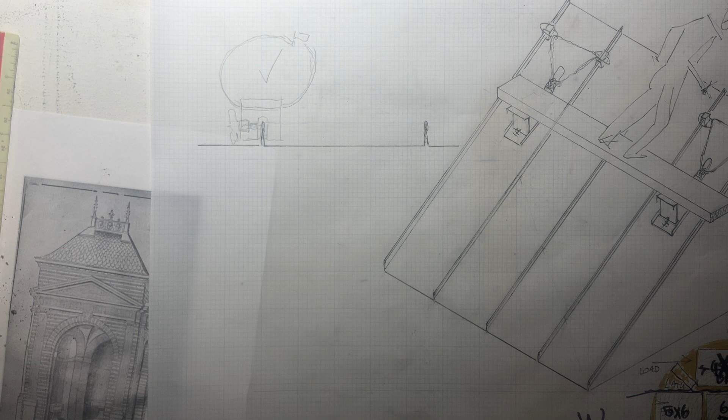Artemio asked a couple days ago, could you do a very basic drawing of a home? I know nothing, but I'd like to learn. Thank you. Buddy, I love this. Truly, this is what we do here. This is what we do here. So, I'm going to walk through my comments to what you told me about your area.

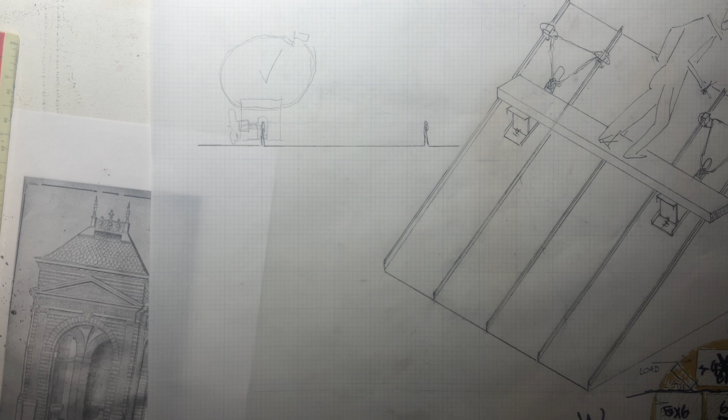First off, we're in Idaho. I don't know that much other than it's a 1925 bungalow. I'm going to assume if it's a bungalow in 1925, it's in a town and not just a lonely house. So it's in a city block on a lot. And with that, we don't want to get too out of bounds with our shop or garage. We want something that's going to blend with the area, blend with the style, right?

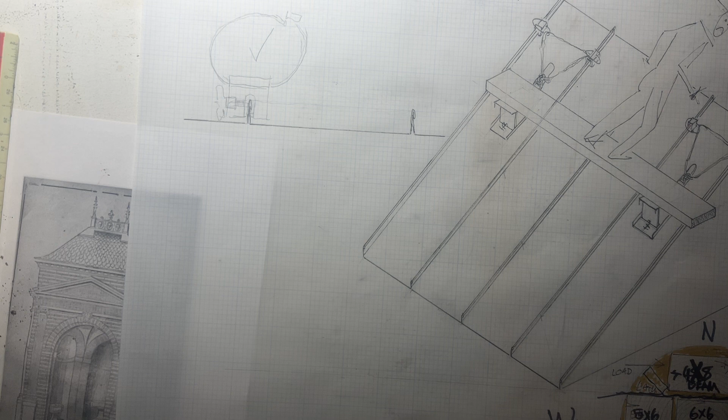So, the first thing that comes up when I search for bungalow garage is an article in American Bungalow. What year is this? It doesn't have a year. 2017 published. The Bungalow Garage. Basically it's just bungalow house styles copied into a one bay space. Which is fine. I don't want to knock it.

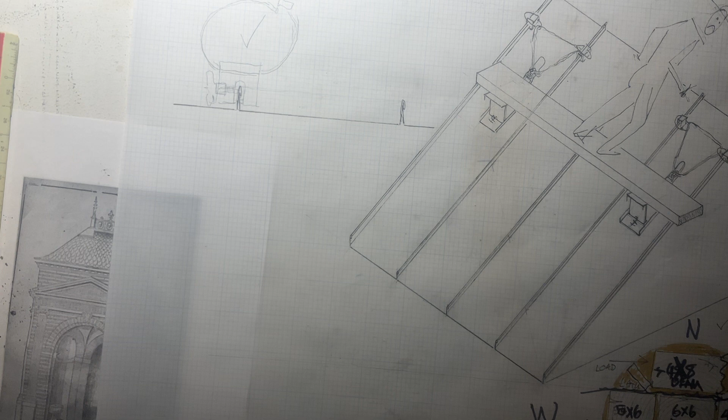There's nothing wrong with that, but the thing about bungalow garages from the 20s and all bungalow houses is they had access to really good timber from a catalog that we don't. And that's the big elephant in the room with all full timber structures or anything that dictates a whole lot of timber consumption, right? Is that we don't have the trees. Yes, trees grow. We're not dumb. We know that trees grow.

Trees grow big enough to harvest, but they don't grow big enough to harvest noble timber like we used to have in the 1800s. You need a couple hundred years for things to regenerate, and you need actual human management on the forest. It's not about virgin forest. It's not that they grew unmaintained. It's they grew managed.

There's a whole video on it on my TV channel, Trad Building Videos. Tom Wessels tells you how to read the forest. Don't watch it unless you want to be depressed, because if you do the forensics honestly, the story isn't great for timber. You need a 2-foot log minimum to make a crown beam.

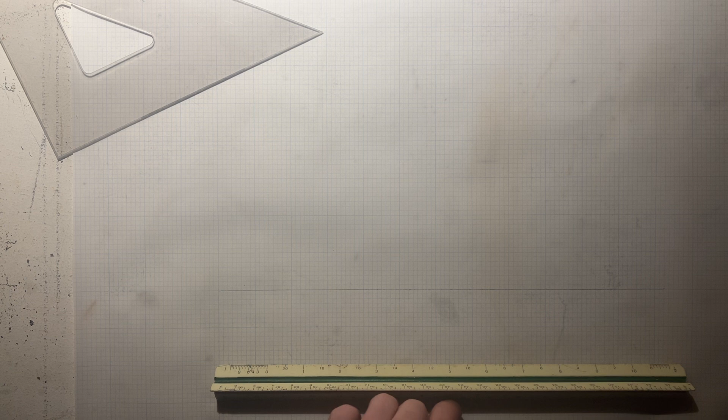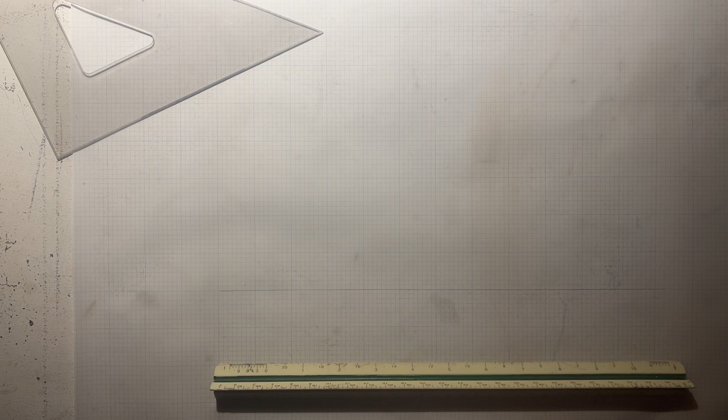This is for Michael Graves or the Mennonites. It doesn't matter. If you're designing a building, the first thing you need is the ground to put it on, right? So you're going to draw a ground line. This is your camera view. Now, the next thing we want to do for a shop is to say, okay, what scale can we fit our thing into here on the page? So this is your scale ruler. It takes your inches and breaks them down into feet per inch on the ruler.

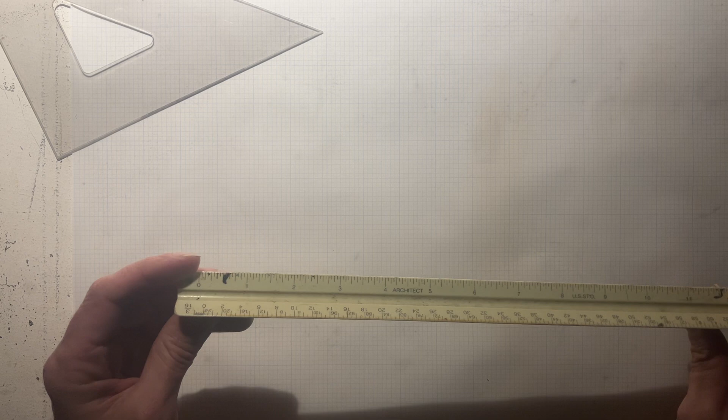So, for instance, if I go to the regular ruler here, this is 1 to 12 inches, and I flip it, this is reading 1/2 inch per foot, right? So on this scale, I can go 1 foot and 6 inches for a 1/2 inch scale. And then I could draw that. So if I had a wall that was 18 inches thick, I could go like that. We don't need an 18-inch thick wall. That's a little big. And this is actually a big small scale.

Instead of a 1/2 inch scale, we're going to go with a 3/8 scale. So if we rotate the ruler to the green bar and flip it around, we got 3/8 scale. What that means is for every 3/8 inches on the ruler, it's representing 1 foot. So you can see now how that gets really useful for architecture, especially if you have grid paper. Because now I can take my scale and my grid paper and do calculations on the grid paper, and as long as they cross the axes, I know they'll match up when I blow them up.

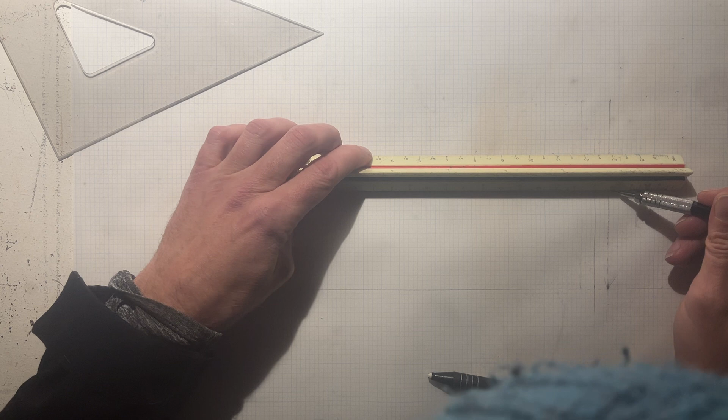And 7 feet tall. So I take my scale here. I find there's 8 foot, there's 7 foot. Put it in on 0. Strike the 7. Boom. I got 7 feet tall right there. And I'm going to go ahead and strike that across the span here now. So I've just drawn in scale my brick wall on the north side.

We know that it's 7 feet tall, so I'm gonna put that in dimensions here now, 7 feet. And I'll put it in down here, 1/2 inch. And that way I don't forget, right? I don't want to go back and be like, oh crap, what scale am I in?

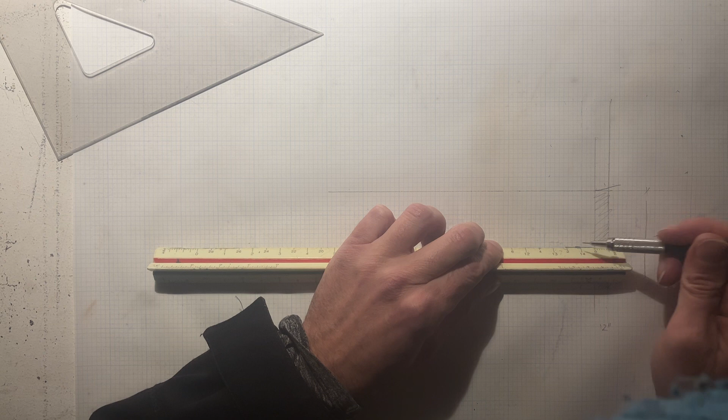Okay, so now we want to decide what this shop is going to be. We want a bench over here, right? We want it to be 3 feet off the ground. So that's 1, 2, 3. It's a tall bench and 3 foot wide. It's like a work table, or 2 foot wide. It's just a bench. We got some cabinets up above. We'll make those 14 inch. How about that? We'll give you the real king treatment here.

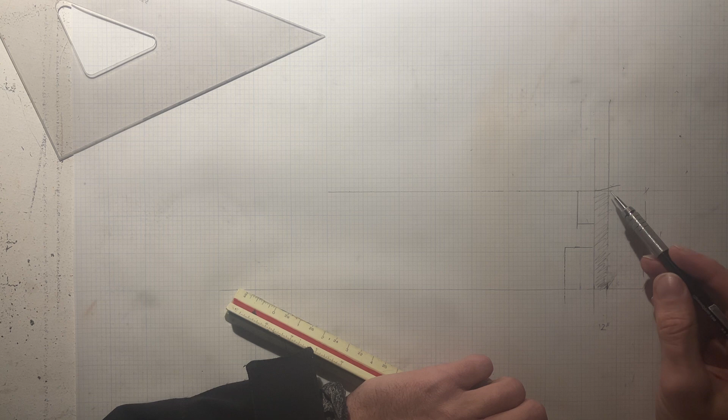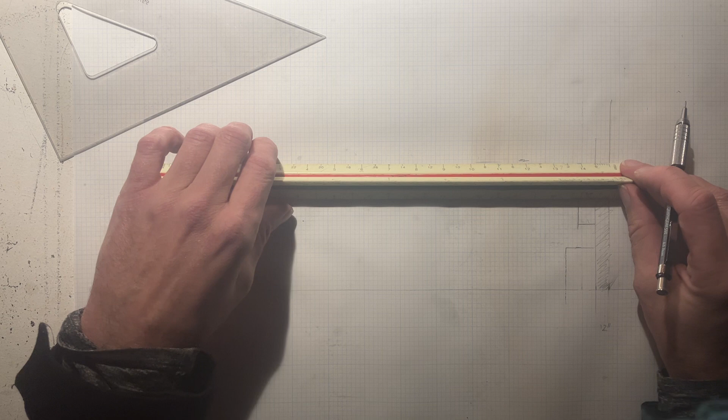Okay, so now we got a workbench and some cabinets. We got a 7 foot ceiling. Now how high do we want to go above that? It's a workshop. You probably want to be able to spin like a 10 foot piece of trim inside there, right? Like at the bare minimum. I would want a 10 foot ceiling in a shop. Just cause. You can compromise if you have to, but we're dreaming here, so let's dream big. 10 foot ceiling, brick wall, up to 10 foot.

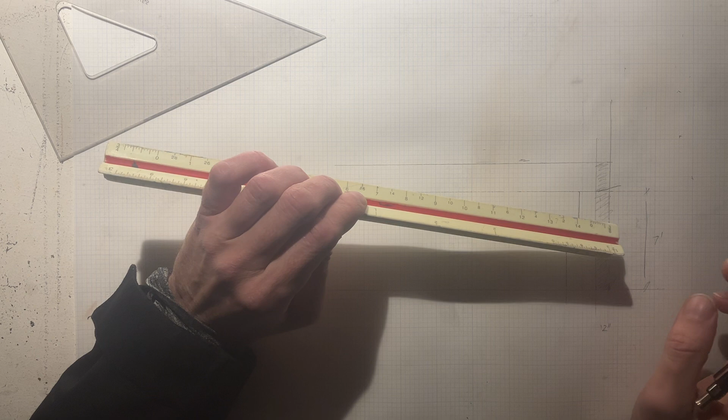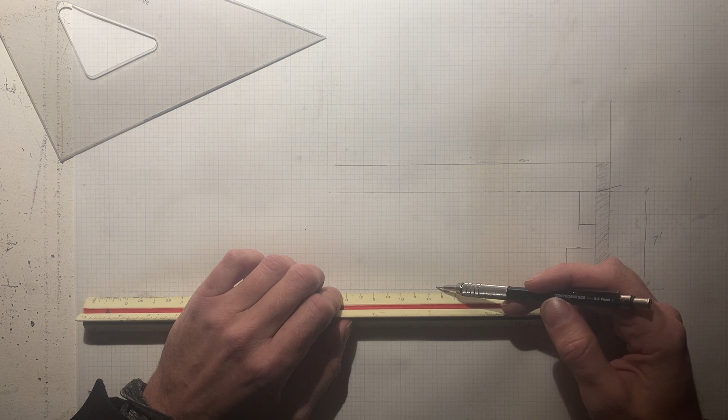Okay, so now how wide do we need this thing to be? Well, we need a car to pull in here. How wide is a car? Shit, I actually don't know that. I don't design for cars. It's probably 5 foot, right? So you want person clearance here, which is 2. And then you need your car. You need room to make your car happy. It's 5 foot, and then you need a person clearance on the other side of that. That's 2 foot. 5 foot seems small for a car. That's like a little bitty Honda. What's a Ford truck? I need to Google this.

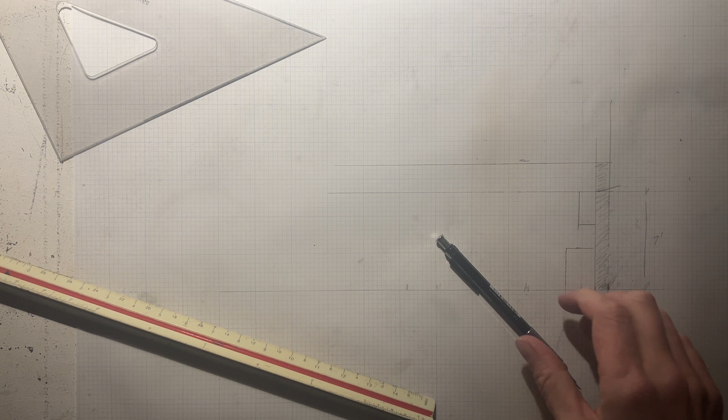So, fun fact, if you go to your old AIA manuals, they tell you all these dimensions. The architects' trade book, they publish one each year with graphical standards, and they have all this figured out already. That's the one thing architects did for us, truly, the ergonomics and stuff, like how to figure out the minimum requirements for a space like this. To put a car in here, to put a person in here, and to have it function, right?

They have done that for 200 years, and they've gotten pretty good at it. But they stopped developing any skills around the 1970s. So you can just go back to their written graphical references to kind of get an idea. I'm going to look this up real quick and quit rambling.

Google, how wide is a pickup truck? First line. Width in inches? You're giving me inches? You fucking rats. Okay, Dodge Ram 1500. I'm looking for the biggest number. 2020. Ugh. Inches without mirrors. The Dodge Ram 3500.

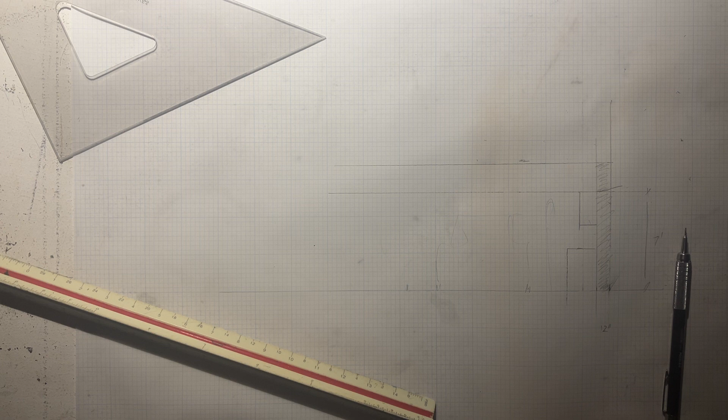Give me a fucking calculator, y'all. Come on. I'm streaming on the phone. I don't feel like doing math. Give me the calculator. Documents, applications. Come on, come on. It's coming. Calculator. Okay, we're going to divide by 12 equals... What? No, that can't be right. 168 feet? No, y'all, come on. Hold on.

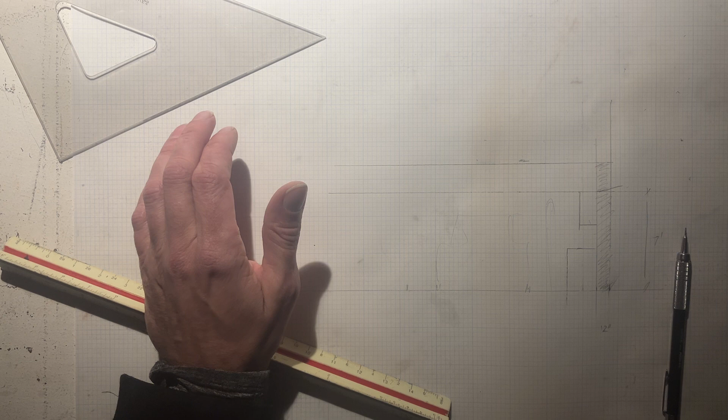Okay, second result. How wide is the average truck? That's the length. I want the width. 6.8 feet is the max. Let's call it 7. All right. Let's get luxurious here. Let's do a 12-foot bay. And then let's do 3 foot for a little guy over here. So that gives us room to pull a big Dodge Ram, according to Google, in here. With an 8-foot door, centered. That sounds about right. That's probably why they have an 8x7 door.

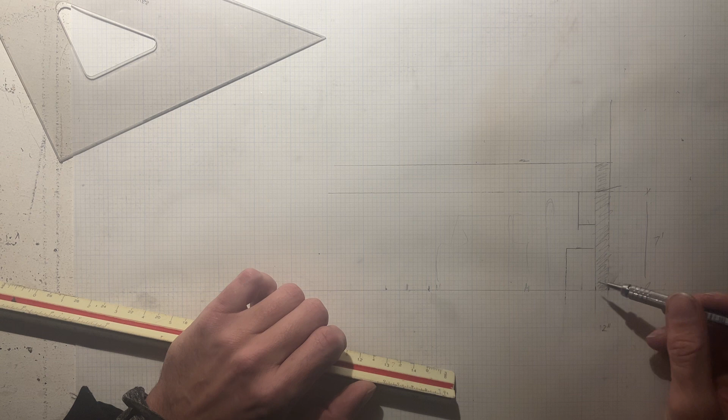Okay, so we're going to pull the big-ass truck in here on an 8-foot door. And if we put the biggest truck in the world in here, we got 3 foot on this side. We get 2 foot on this side. We got a little shop over here. We don't know how long it is yet. We'll deal with that later. But we're just doing a section right now.

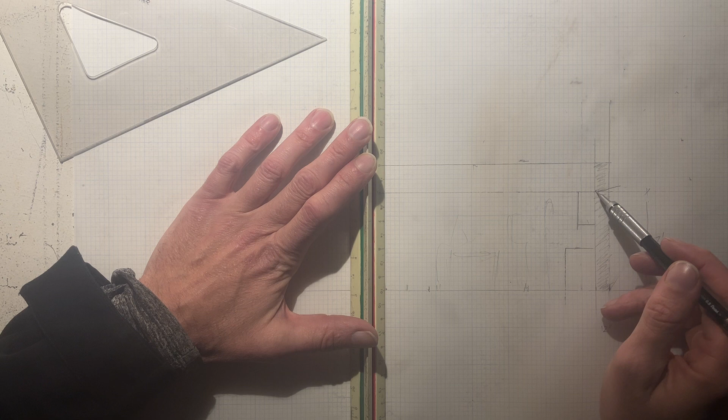So, now, here's where we get to the cool part. We decided that our ceiling height was going to be like 10 foot. But that's in the middle of the shop, right? That's if you were out here spinning a piece of trim or something like that, working on a rolly bench, I would imagine. Over here, you don't need it to be like that. Let's draw our other wall in.

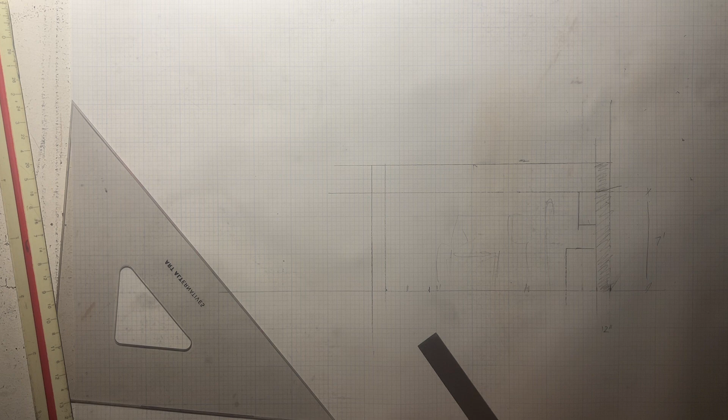Right? And then the next thing I really want to get in here is my sun angle. That's the thing that I was looking up online that made the most sense to me to base this design around, was the angle of the sun in the winter, which y'all are living up there. 75 degrees, right? At the peak of the winter sun, in the worst of the winter.

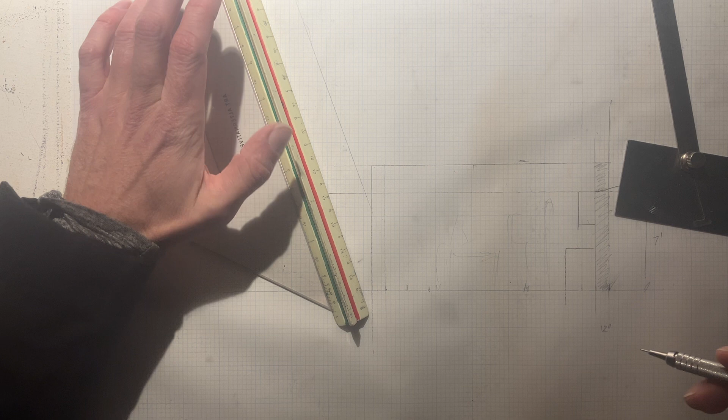Oh, I'm sorry, summer. Oh my God. At the worst of the summer, your shit's coming in at 75 degrees, right? In the winter, it's coming in at a paltry 26 degrees. Right there.

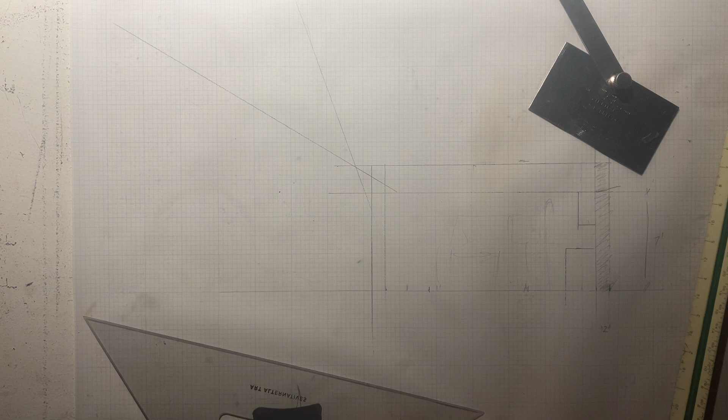So, the idea for this structure is to catch all of the sun at its highest point in the summer and bounce it off, right, into the north. But in the winter, we want to soak all of that up so it'll radiate on your floor, back up onto this wall here, and warm that

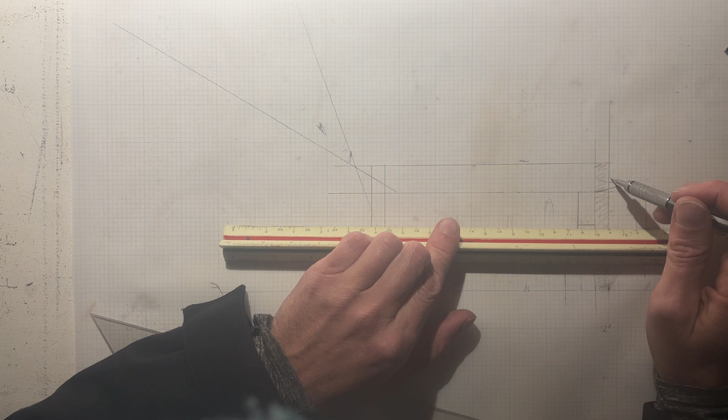shop up real nice. So what I'm going to do is actually just, I'm doing this so lazy, I'm just going to average the difference right here, eyeball it. And I'm going to go halfway down on this knee wall. I'm calling that my rafter line. Okay. And then the next thing I want to do is figure out where my opening top and bottoms go.

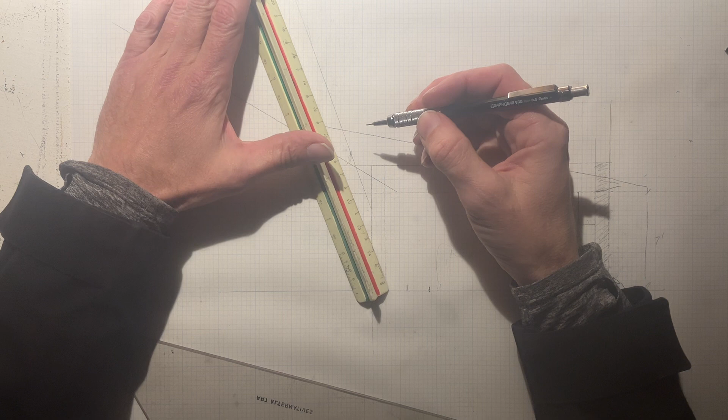So if this is our summer sun, right? Let's project it all the way out to like right here. Right? So our summer sun angle at the highest, like at the worst day in the summer, when this thing is just loaded to the max, it's coming in about right there. We're going to put our sill. It's a garage. We don't want peekers. Right? Let's put our sill right here. How about that? Let's see what that looks like.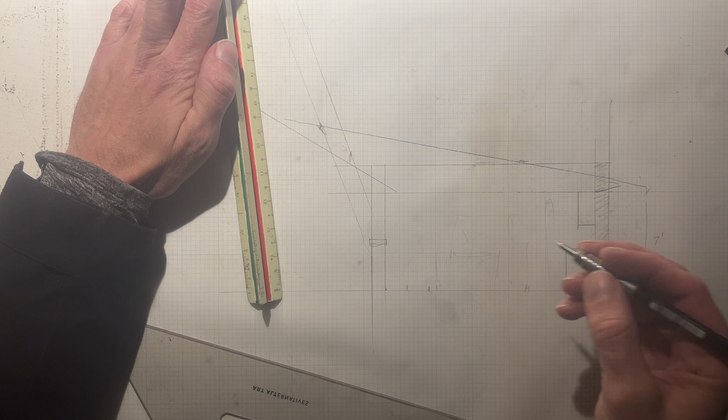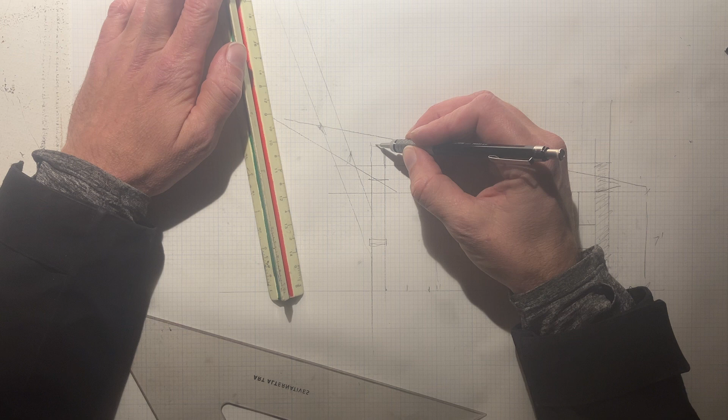And then we're going to do a lintel up here, 12 by 12. Just a real basic brick beam, 12 by 12 all the way through. And then we could just carry our wall all the way up and have the trusses rest on the wall. That's a 6-inch truss. That's like an 8-inch. Let's do an 8-inch truss. That should be good enough. I don't know what your snow loads are like.

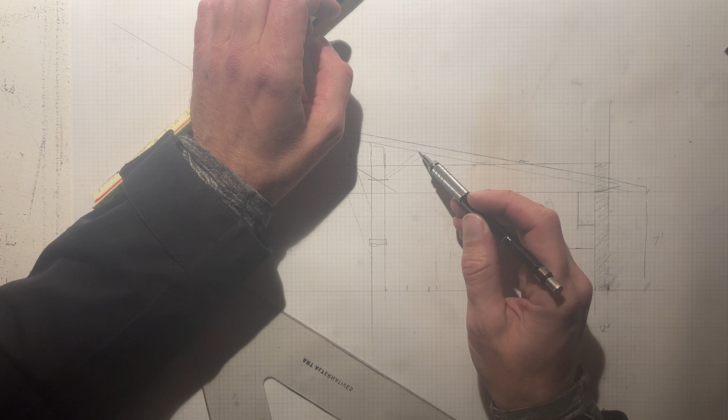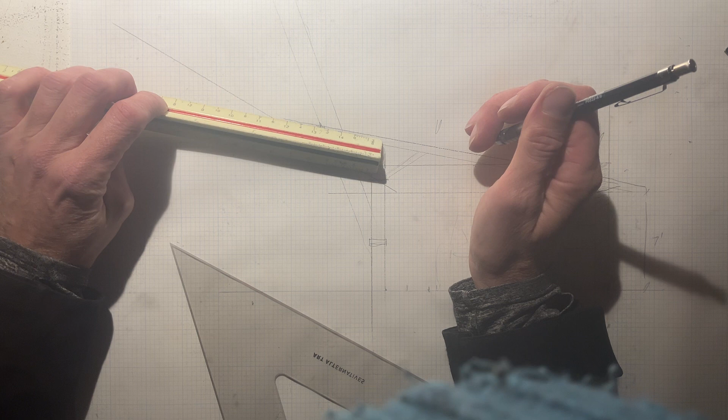If you brace into the wall right above the windows like this, that's breaking you down to a... How much of a span do we have here? That's a 12-foot span. 12 foot, so not even that bad. And then if you do this overhang, that's a 3-foot overhang, so that's a little heavy.

We could probably cut this back to like 2.5 and still get our optimal sun angle, because you may want a little bit of that winter sun, or sorry, a little bit of that summer sun coming in. You don't want it to be like a cave. Like, you don't want to get rid of all of it.

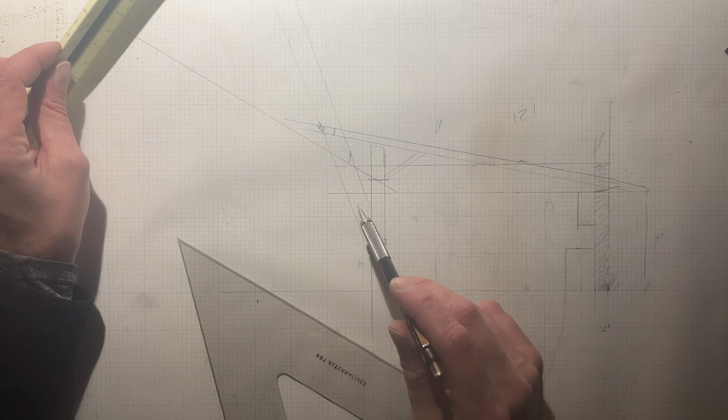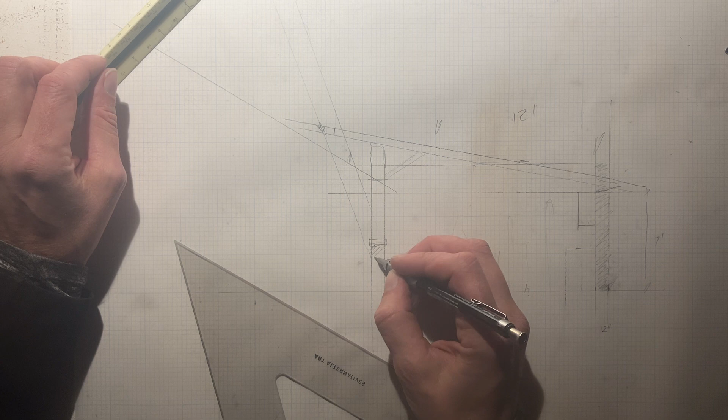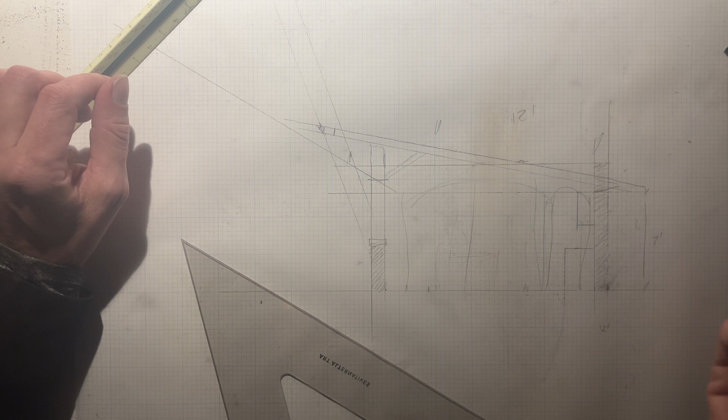So again, that's sort of how I would attack this, is to do brick wall, and then frame this in and do whatever kind of doors you fancy. And then you could do a door right here, so you have a garage door, regular. It's a 1-car garage. It's nothing fancy. But the showpiece for this thing is this whole side of arches and windows.

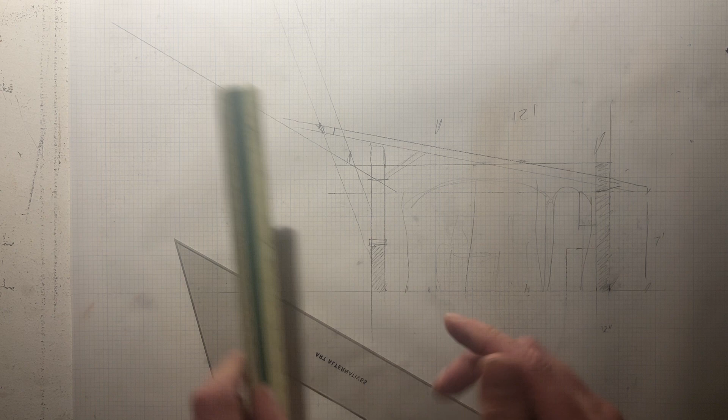So on this brick wall is just a regular brick wall. This brick wall is 4 feet or whatever of brick. How much we got here? 3 feet. Okay, so 3 feet up, stone sill, steel casements like factory windows, and then like 2 arches to make the span. So down the side, you'd have your garden wall, you'd have your pillar, arch. Kind of like a craftsman porch. I've seen them done this way.

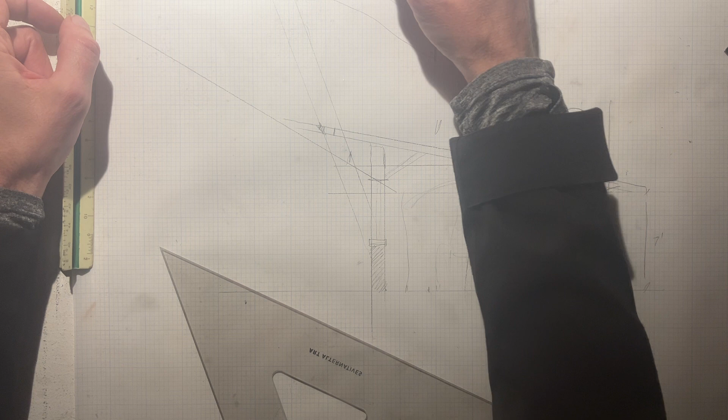And then you just get your big factory windows in here, steel casements. And then on this side, you got your brick wall. Timber across the middle here. Frame it in with stick framing or whatever. Frame your door in. Get your garage door spec. No need to splurge on that. And then just do your shed roof on top.

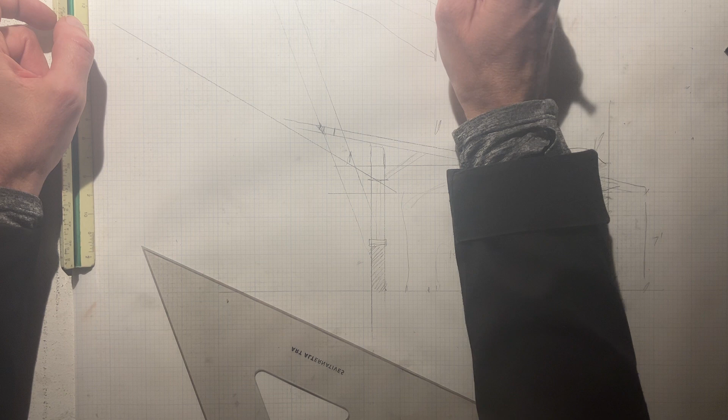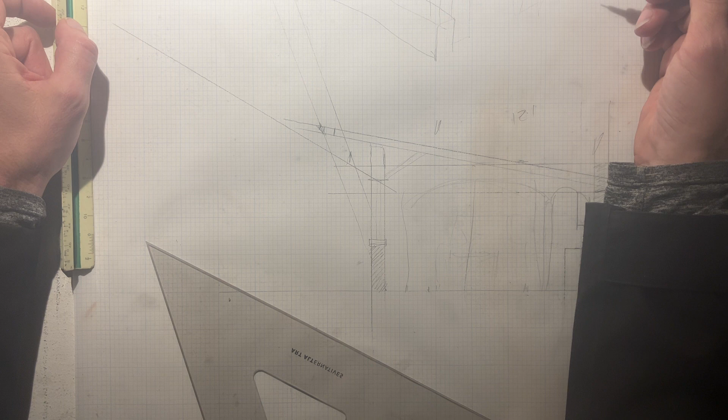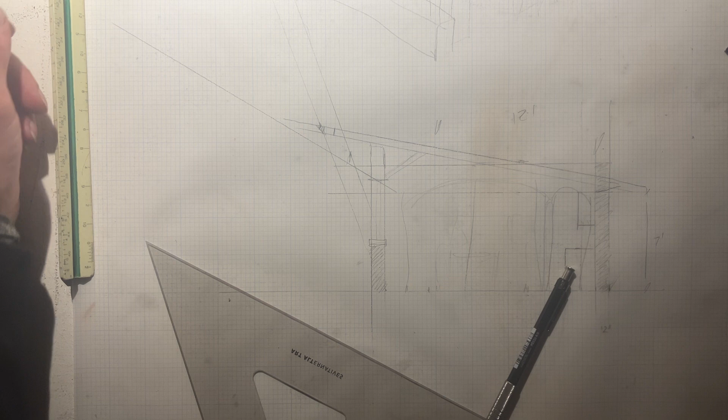But I think for a basic bungalow garage, this is something they would have built in the time period with the tools and resources at their disposal. So that's kind of where I'm basing my design from.